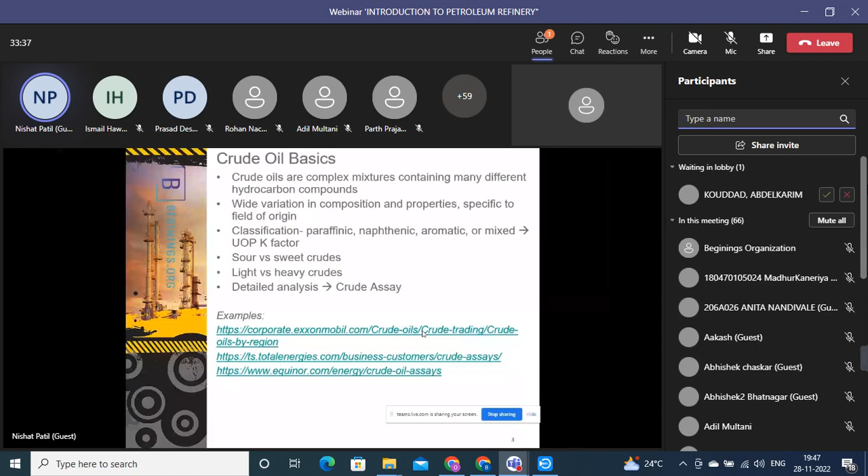If you ever get the chance, there is a tree diagram of crude oil, with n number of branches. If you look at this diagram, which is available on the internet, you will come to know there are n number of molecules, and each molecule can give you 5, 10, 20 products. So there are aromatics, polymers, and specialty chemicals. There are many, many things. So crude oil has a wide variation in composition and properties specific to the field of origin.

What it means is, say, African crude will have different properties than the Russian crudes, right? Or the crudes that are found in Arabia, those would have different properties, right? So how is it classified? On a superficial level, I would say it is about PONA, that is paraffins, olefins, naphthenes, and aromatics. It's called PONA. So whether the crude is mostly paraffinic, naphthenic, or aromatic, that is defined by the UOP K factor, right?

I'm not giving each and everything on the slide because the slides will run into hundreds. So whatever new terms you find, just jot them down in your notebook. After this session, search on the internet what the UOP K factor is, or some of you might have already got this answer. So the UOP K factor gives an idea of what kind of crude it would be. But the UOP K factor alone does not define the crude.

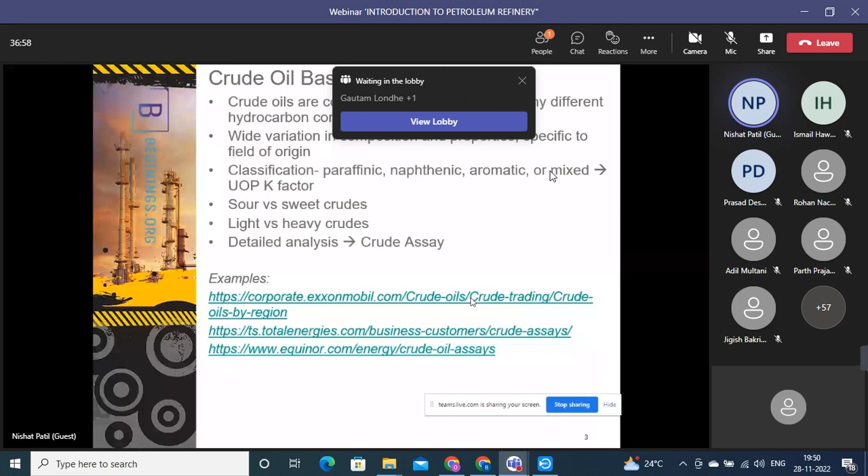So the sulfur is brought to the minimum because pollution is rising. You know global warming, right? The lesser the sulfur, the better it is for our environment. It will pollute less. That's why the harmful toxic gases released into the atmosphere through vehicular pollution get reduced if we have sweeter products from the crude oil refinery. Vehicular emission is the most dangerous because it is huge in quantity. Every household has got a car, right? And there are heavy vehicles. We are still dependent on trucks and transportation which use diesel, and some of these vehicles are way old, and older vehicles pollute more, right?

Then light versus heavy crudes. Light and heavy, as the name goes, is about the density or specific gravity, or it is called API. API is inverse to specific gravity. So higher API means lighter crude, and lower API means heavier crude. There's a simple formula to convert specific gravity into API. So most of the time, crude density is expressed in terms of API.

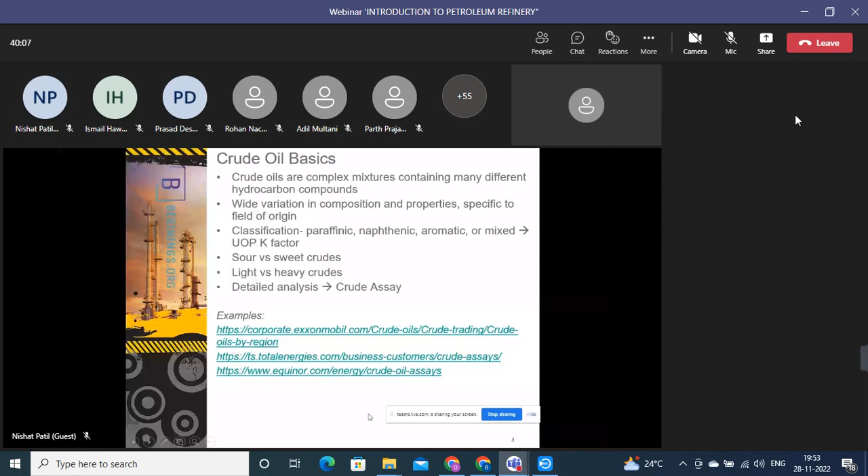Hello, sorry for the disturbance. Nishat sir, your mic is muted. Oh, sorry. Oh my God, I'm very sorry. I was speaking for the past 5-10 minutes. Sorry, Sudarshan. Sorry, guys. Let me start all over again. Is my screen visible? Yes, sir. Very sorry for that. So, did you hear anything? I don't know when I pressed mute.

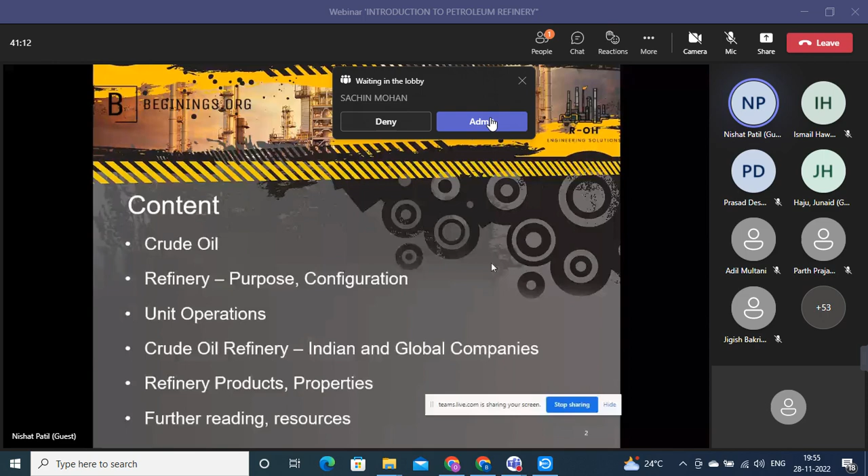Did everyone hear this slide? No, sir. Actually, we heard till how to determine whether the crude is sour or sweet, and then after that it became muted. Okay. It was working until API.

Yes, sir. Yes. API, absolutely. Okay, okay, so I did not mute. I think maybe one of the organizers, some technical glitch was there, by mistake put me on. Okay then, all right, no problem.

So I was talking about API, the light versus heavy crudes. So API is basically density in some other form, okay? And it is very convenient to express that in terms of API, and hence that is the commonly accepted terminology across the crude oil world. So higher API means lower density, light, and lesser API means heavier crude. So it is the reverse of specific gravity, right? So always keep that in mind.

Now, all this information, density, sulfur content, acidity, PONA, whether paraffinic, naphthenic, aromatic, where are you going to get all this information? The corporates which deal in the crude oil business publish the crude assays of their respective exploration sites on their websites. Some of these assays are not published if that information is confidential. Say if they have found a new field, a new crude, they might not publish it immediately. They will take it to the market, and that information may be sensitive to the business. But most of the old assays, crudes which have been used over years by many refiners, are available on these websites. So I have listed three, but there are many.

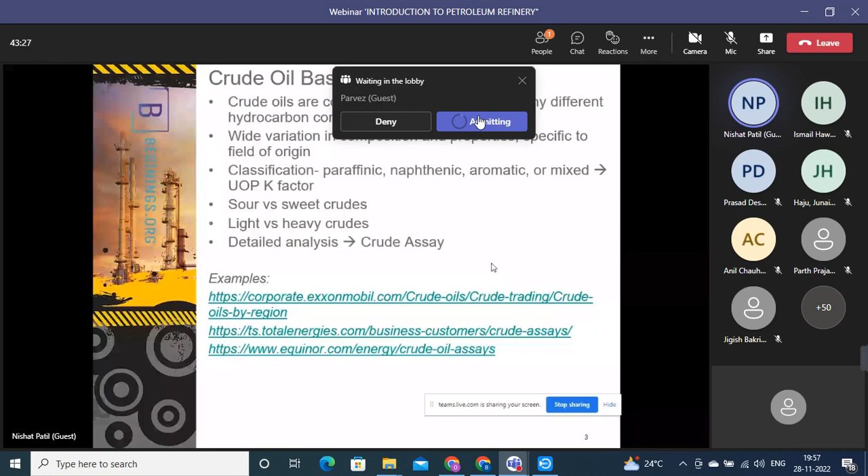And you may be aware of simulation softwares like Aspen HYSYS. These softwares have a crude assay data bank, so they have all the information inside the simulation software in the data banks. One can simply select the type of crude, which already has the information built into the simulation model, and you can create a stream out of that crude. So you can say, okay, 10,000 barrels per day, and that stream is created. Then once you click on the properties, you will get various properties. I will go through those properties, what are the important things that you have to look at in a crude.

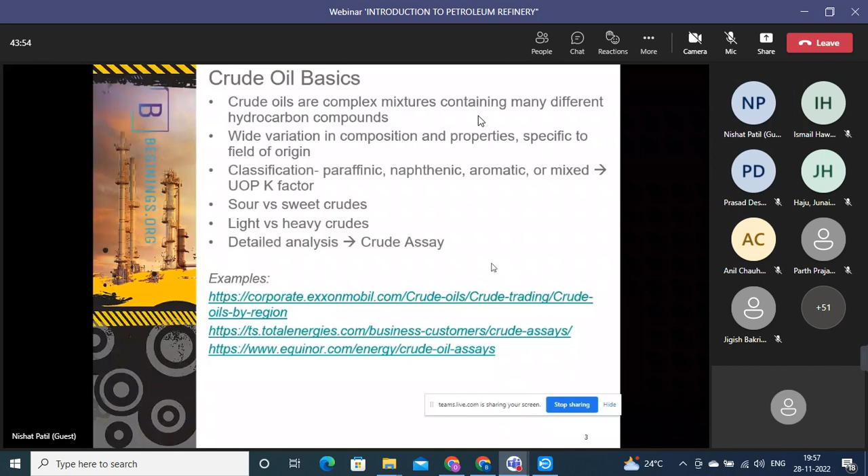So let me just open a few of these, say maybe ExxonMobil. Is this website visible? Yes, it's visible. Okay, okay.

Now here you can see a list of crude oils by geographic location: Europe, North America, South America, Asia Pacific, Africa, Middle East, Central Asia. In Europe, you will find it country-wise. So in Norway, ExxonMobil has 11 sources. In the United Kingdom, there are five. North America, Canada. Now the Canadian crudes are different crudes. Those are like bitumen-like crudes, called sand crudes. So those are heavy crudes, and those need different treatment. And this particular region on the northern side, Canada, North America, becomes very cold at times, at freezing temperatures, so movement of these crudes through pipelines becomes very challenging. So every geography in the world has its own challenges.

United States, you can see some peculiar names, and I don't know who named these crudes, but say Elisa, Unity Gold, Gippsland Blend. A blend is where there may be multiple sources of crude, and ultimately you get some resultant composition. In Africa, you have Angola, Chad, Equatorial Guinea, Nigeria. Nigeria has got crude assays. Middle East, Azerbaijan, Iraq, United Arab Emirates, Yemen. So those are different examples. So let us see, say, Indonesia, and I open this Banyu Urip. This is one type of crude.

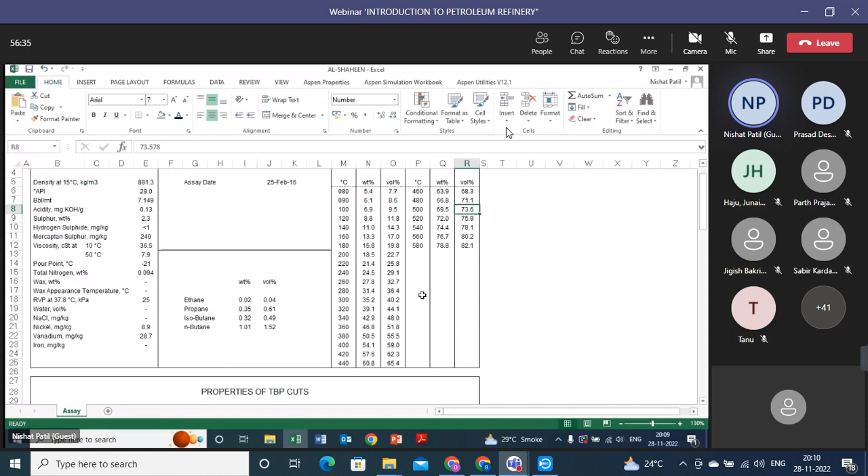That's a very good information and then this is again a better assay than Exxon. See, there's a lot of information. So what they are telling you is that if you process this crude in a refinery, you will get this much of products. This is the yield of the products. How much naphtha you can get. What is the property of naphtha?

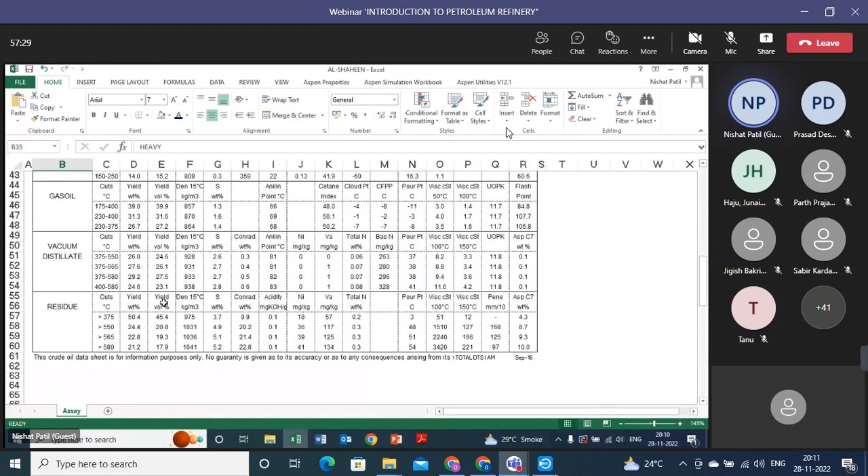What is the RON, research octane number, and motor octane number. Octane number is typically 90, 92. You might have seen it in petrol pumps. So it gives you products and their properties. Fantastic, right? So this gives you a whole lot of information. And that's why I started with crude oil rather than jumping to what is a refinery. So once you are familiar with the crude, then understanding CDU and VDU and other units will be very easy.

What CDU is doing is basically, these are the cuts, and the column is designed in such a way that there are different draws along the height of the tower. So say from the top, on the 15th tray, suppose heavy naphtha cut is taken, so the design is such that on the 15th tray this boiling material will come out in a pipe, and then you will have further processing of that. Then the laboratory takes samples, they collect, they check all other properties, whether it is on spec or off spec.

Okay, so crude oil, you can visit and increase your knowledge. There's a lot of information available on the different websites.

I hope I'm not on mute. Okay. Any questions here? No, so far.

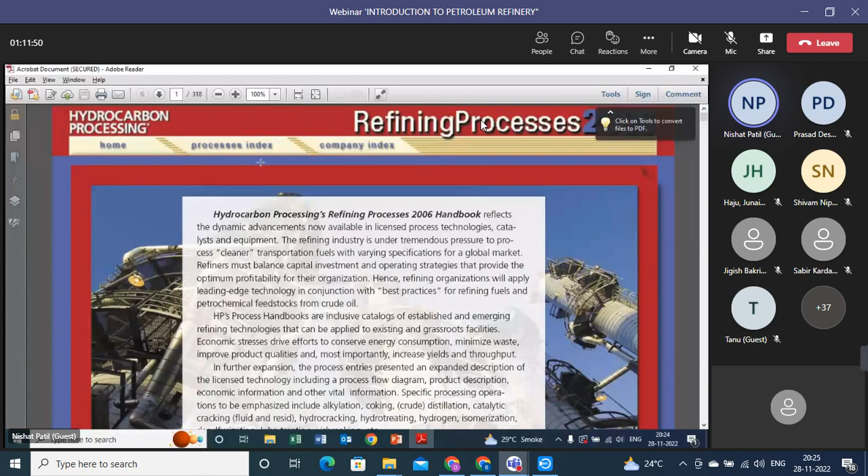Now I'm going to show you another resource. This is a PDF file. So this is Hydrocarbon Processing, and this is a handbook of 2006. I do not have the latest handbook. What it gives you is all the processes there are in a refinery. These are all listed here. Okay. So we just saw catalytic reforming.

If I just click catalytic reforming, it gives me a block flow diagram and a very brief one-page summary of that unit. What is that unit? What is the description? What is the typical design? What are the typical operating conditions? Installations, how many units are there in the world? But this is as per 2006, and it gives you a reference. So this is coming from the NPRA annual meeting. Or I go back to home.

Say for example, we talked about hydrocracking. Hydrocracking, yeah. Here. So what is hydrocracking? Upgrade vacuum gas oil blended with various feedstocks. Products: jet fuel, diesel, very low sulfur fuel oil, FCC feed. So FCC is another secondary unit, fluidized catalytic cracking unit. My favorite. So the hydrocracker will produce a stream which will be fed to other unit.

So this is super fun in a refinery, where the streams produced in one unit are fed to another unit, and then all these units make similar products, say diesel, and these are collected in a common place, and that is called blending. So all these streams are blended in the right amount so that the final blended product adheres to all the specifications of BS3, 4, 5, whatever, right?

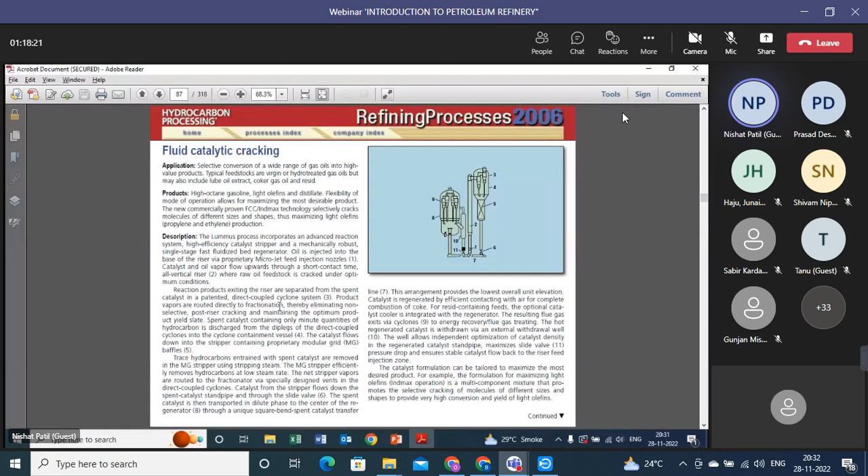So I can share this, because I don't know where I got this, but I have it with me. Or you may find it on the internet, I don't know. So you can see there are so many processes given. Sulfur recovery.

Sulfur recovery is, as I told you, like hydrotreating units. The hydrogen reacts with sulfur and produces H2S. Now this H2S is absorbed by amine, and these amines are then sent through a regeneration tower where H2S is stripped from that amine, and that amine becomes lean amine again, and then it is again circulated. So that is a closed system.

It absorbs H2S, it releases H2S, and once that H2S is released, it is sent to the sulfur recovery unit, which is also called acid gas. H2S and CO2 are called acid gas, and there is a Claus recovery process. You might have studied it.

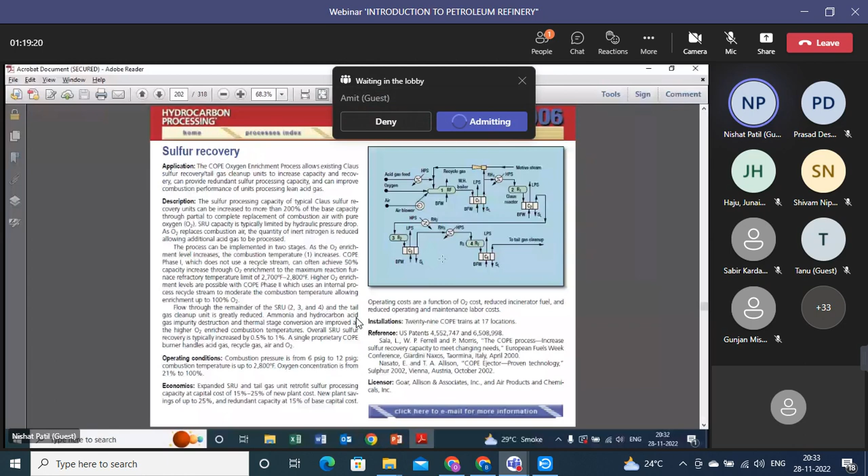So what we get is yellow solid sulfur, the product of this unit, which is used in fertilizers. Sulfur is required there, and even that sulfur fetches a good value, maybe 5-10 rupees a kilo, or less or more than that, but that's the price I remember when I was there. So sulfur recovery gives you a sulfur product.

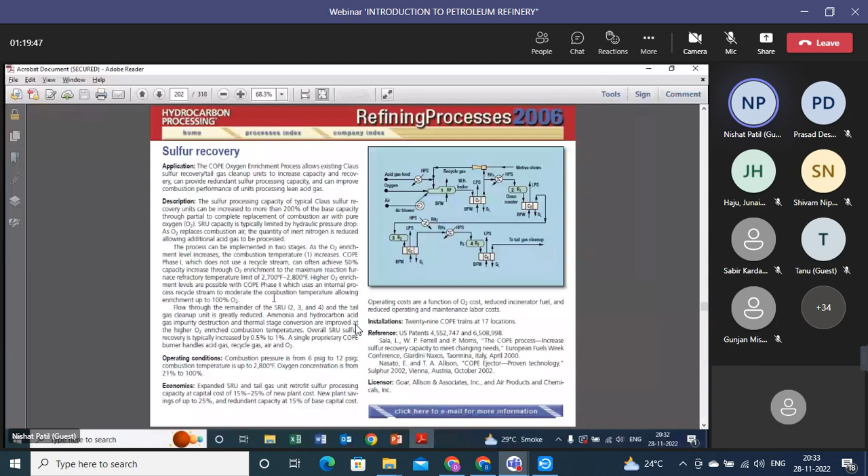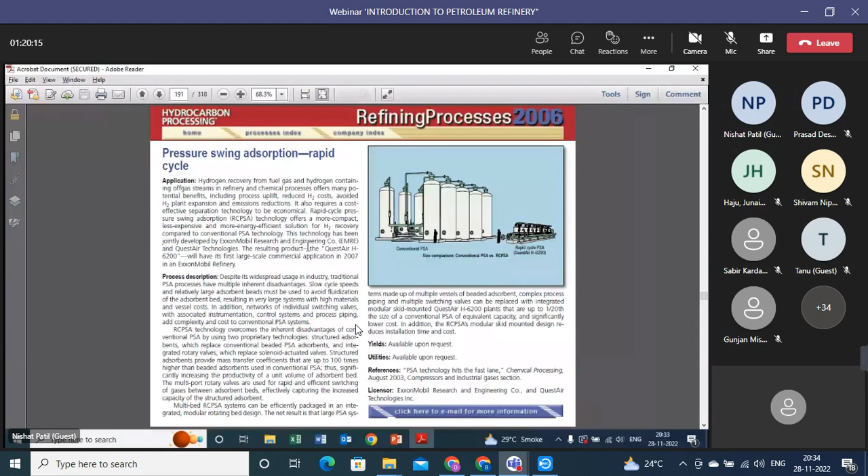So if you see, there are many now. The pressure swing adsorption, where hydrogen is produced. The hydrogen you feed to hydrotreating units is 99.9% pure, almost 100% pure. So the technique that you utilize is pressure swing adsorption, PSA. This is another very interesting unit operation. So this is one file that I wanted to show to you.

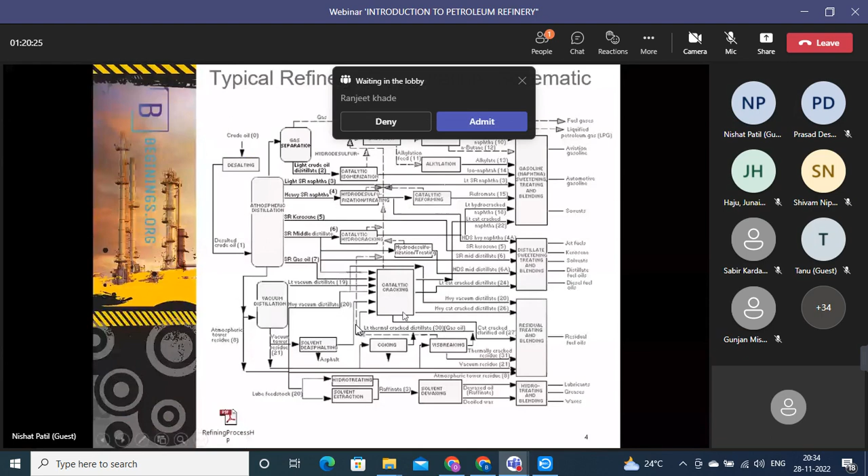Now let us move. I think we'll have to move faster. It's already 8:30.

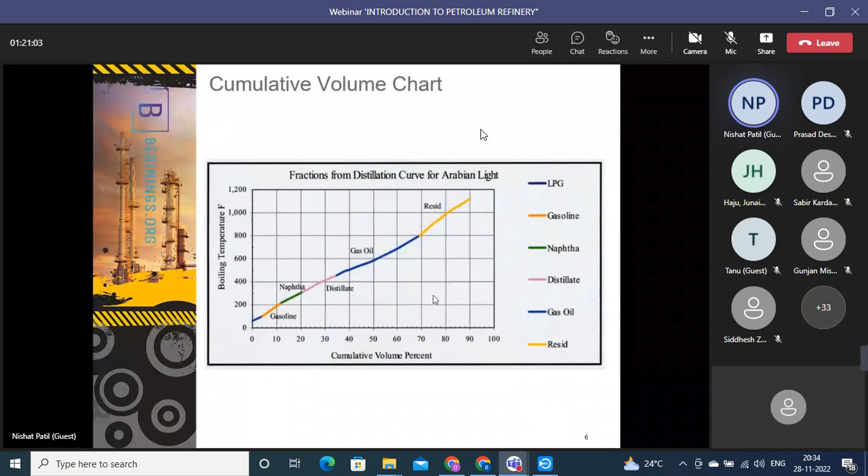So I hope this configuration is clear to you. CDU and VDU are mother units, and there are secondary, primary cracking units, hydrotreating units, catalytic cracking units, and on the right hand side you get all these products.

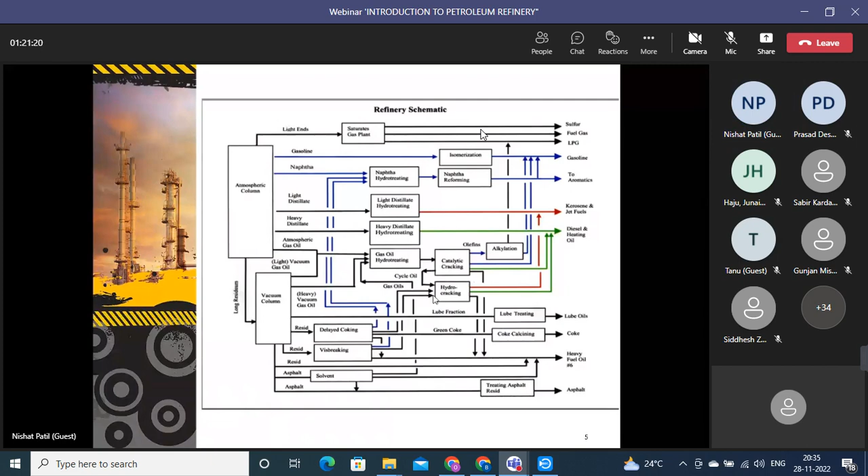Unit operations. What are the different unit operations? Distillation, and there are different types: vacuum distillation, atmospheric distillation, steam stripper. What happens in a steam stripper? Basically, RVP, Reid vapor pressure, is controlled. So the lighters are stripped off in small towers. Extractive distillation is used in lube oil manufacturing plants.

Absorbers, that is the H2S absorber. I just mentioned the amine absorber. So amine absorbs H2S. What are the other unit operations? Catalytic reactors. There may be high pressure reactors, low pressure reactors, fixed bed, fluidized bed.

Compression of gases. So there are many hydrogen compressors, because that compressed hydrogen has to go to the hydrotreating unit, because those reactors are operated at high pressure. So your hydrogen has to be above that pressure to enter that reactor. So there are many positive displacement compressors for hydrogen.

Pumping is most common. Many pumps, hot temperature pumps, normal temperature, various types of pumps, small, big. Pressure swing adsorption, we just saw. Blending, I just mentioned it.

Heat transfer operation is mainly shell and tube heat exchangers, and there are specialized types of exchangers called Packinox exchangers, which are plate and frame exchangers. Plate and frame gives you a lot of heat transfer area in a small setup, and you can get a very good approach there, and more differential temperature across these plate and frame heat exchangers.

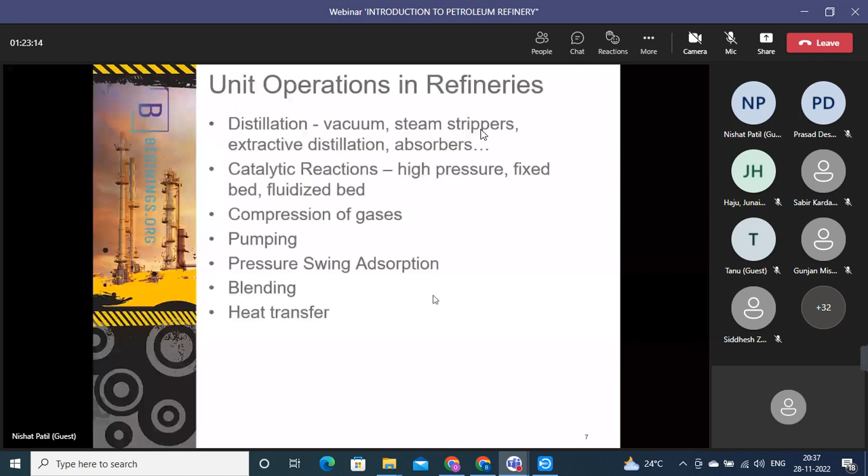What are the equipment and systems for these unit operations? I just mentioned crude desalting in the schematic. Now distillation, there can be tray towers or packed towers. In vacuum especially you will find packed towers because you want to minimize the differential pressure. If differential pressure is high, then the ejectors that maintain the vacuum use more steam. So your steam consumption will go high if the vacuum tower delta P is high.

There are many big furnaces, small furnaces also, but the atmospheric distillation has the biggest furnace in the refinery. Boilers for producing steam, centrifugal compressors, positive displacement compressors. These are run typically by steam turbines, or in older plants there are motor operated compressors as well. So there are two drivers for compressors and pumps, steam turbine or motor.

Ejectors, steam ejectors, shell and tube heat exchangers, flare system. This is another very interesting topic, the flare system, and there are many softwares, Aspen Flare and others. And flare design has got its own.

There's again another set of standards to design a flare system. So the flare piping runs across the refinery. So it is very important, and it is the ultimate safety for a refinery. So कहीं पे pressure बढ़ गया column में, or suppose there is a fire, then your hydrocarbons are going to get heated. Lot of vapors are going to form, and how do you vent those vapors? You cannot vent it in open.

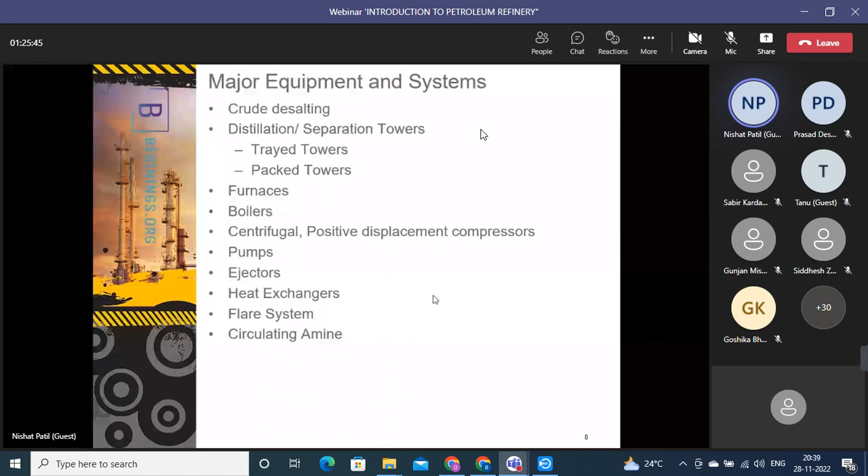Those have to be burnt at height. Typical flare stack height is 80 meters, 90 meters. So those gases are burned at that much of height. You might have seen traveling through Trombay, Chembur, HPCL and BPCL is there. So on the road, you will see their flares. So those gases are burned at top so that the dispersion is there and it does not affect the resident area. Circulating amine system, that is a closed system.

Major oil refining companies in India: IOCL, BPCL, HPCL, MRPL, CPCL. So these are state-run companies, also called as public sector units. Reliance is a private. Nayara is formerly called as Essar. Then Russia's Rosneft picked up their stake in Essar, and now it's called as Nayara. Globally, Aramco, you cannot imagine the revenue of these companies. They are in billions of dollars. Marathon, ExxonMobil, British Petroleum, Chevron, Phillips 66, Shell, many good companies, huge corporates.

So this is published in your Ministry of Petroleum and Natural Gas government website. You can find this table there. So what you have is a refinery location, in which year the refinery started, and what is the capacity. So if you see, the total capacity of India is 249 million metric ton per annum. That much of crude is processed every year across all these refineries together.

So the oldest one is Digboi in Assam. So there is a story that when the crude oil was being explored at that site, the colonial leaders, the Britishers and French, were there to explore the oil, and they had those laborers there. There were no equipment or sophisticated machineries that time. It was 1901. So there were a lot of laborers, and they used to shout, "Dig, dig, boy, dig." Boy, you dig there to get the crude oil, and that's how this name is there. So there are many interesting stories. I have this one book. I have that slide last.

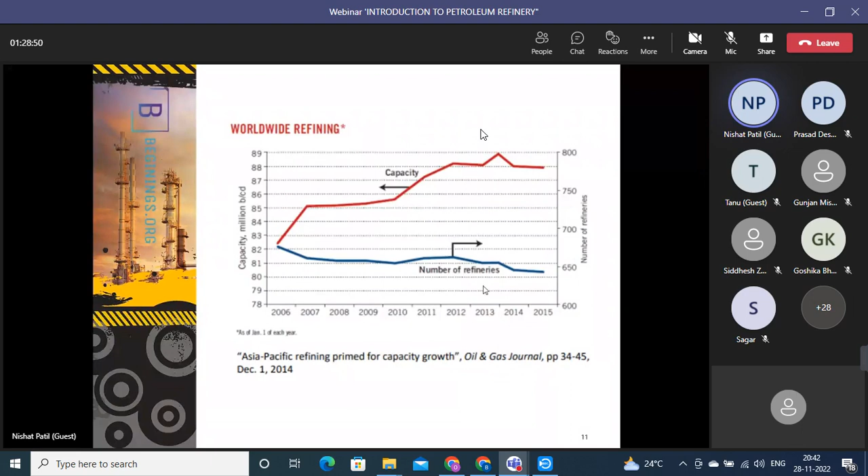What are the products? I think I discussed few of them, but let us go through this. Liquefied petroleum gas, all of us know, cylinder. Propylene is produced and main producer is FCC unit. That goes as feedstock for polypropylene, which is a very high value polymer. Naphtha is something like gasoline. Gasoline is a transportation fuel. We know petrol. ATF जो aeroplanes में होते हैं.

Superior kerosene oil, domestic fuel, but that is slowly being phased out. Now, kerosene use is very restricted. Maybe in villages they may be using kerosene, but in urban areas, it's no more there. High speed diesel, sulfur, fuel oil, bitumen. Bitumen is used in road construction. But again, concrete roads are being built, so the demand for bitumen is not much there now.

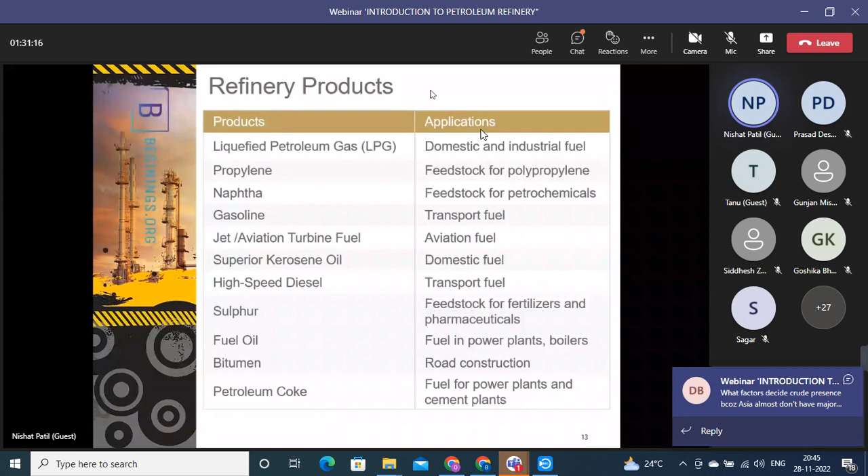Refinery crude and products. So crude का properties मैंने आपको बताया वो ऐसे में. We also discuss IBP, FBP, ASTM, density, sulfur content. There are specifications. So yeah, octane number and cetane number. So basically, if you are aware, like gasoline engine में क्या होता है? The gasoline and air both are compressed. Okay, so there is an octane number, and higher is the octane number, less is the knocking tendency, and higher is the efficiency of the engine, and it gives you good mileage.

Diesel cetane number. So in diesel engines, only air is compressed, right? Diesel is not compressed because it is slightly heavier, viscous as compared to gasoline. So they follow cetane number. There is no octane number. ATF, freezing point; LPG, Reid vapor pressure; naphtha, RVP, PONA; bitumen is a penetration number. So these are just one or two properties I mentioned, but there is a long laundry list of 10 to 20 odd properties for each of the products that is specified. You can find it on all those websites of IOCL, HPCL, BPCL.

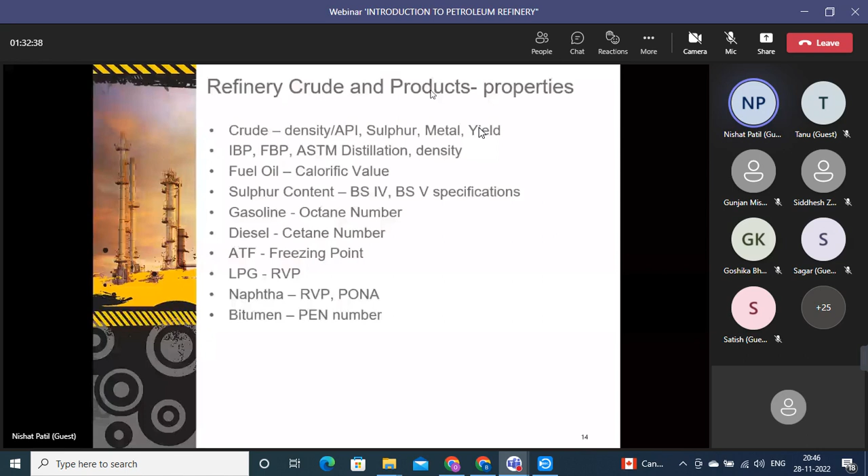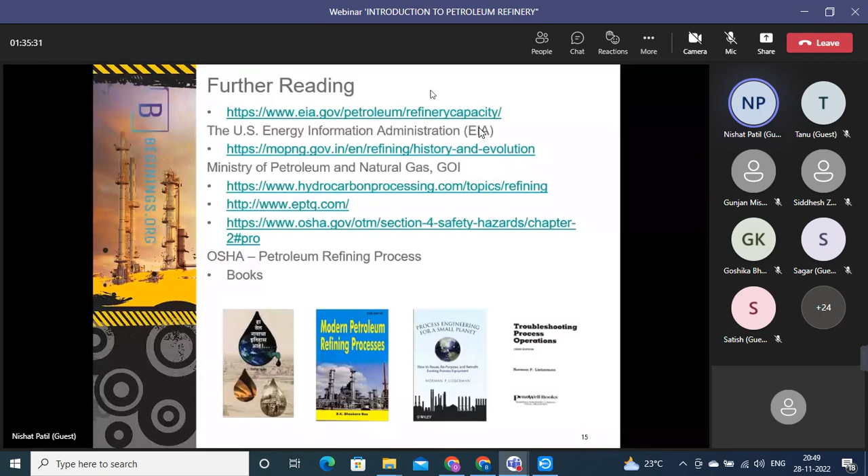There is one question by Dipti Bari. What factors decide crude presence? Because Asia almost does not have major crude resources. Yeah, so Dipti, it is all, I would say, God gifted. Because Asia, yes, Asia has got crude reservoirs. It's not that we do not have it, but we'll have to spend a lot of money on research and development. Then you can find new resources of crude.

But it is over hundreds of years that within the earth those things have happened. So it is really difficult to say why it is not here and why it is there. It's just like that, because Saudi Arabia is gifted with oil. Now US, they discovered shale oil, right? So the shale oil was there, but they invested heavily on R&D and then they found out. So something like that in India may be there, but for that we have to spend a lot of crores of rupees in research and development. Yeah.